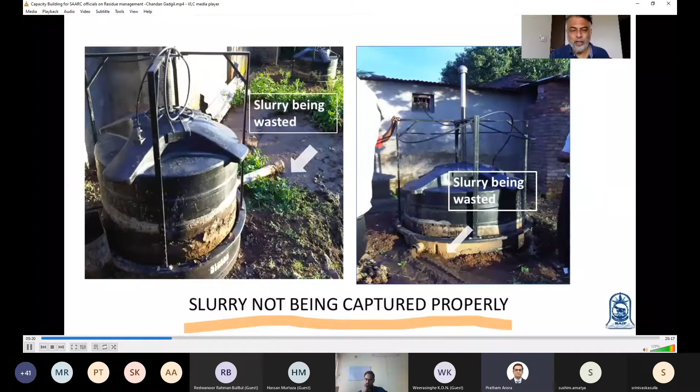This slurry normally, typically is either wasted or not used properly. So how do we capture the slurry or the residue? I will quickly talk on the small biogas plant and then move on to the large plants.

So this is what we have done in BAIF, where we have created a filter where the slurry is captured. The filter has two components: one is the top part and the second is the bottom part. The slurry comes in and it is kept for 24 hours, where it slowly trickles down and the liquid is captured at the bottom, and at the top we get the cake.

You can see in the third picture that this is the cake that comes out of the filter, and here we can collect the liquid. Both these are value added products where we can convert them into, say, vermicompost, and the liquid also can be put into the soil.

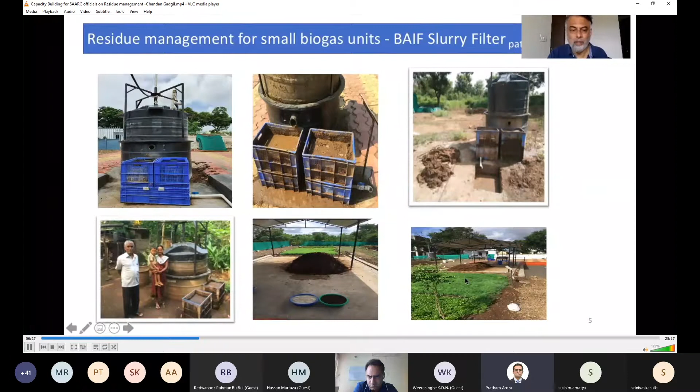We can improve the financial viability by focusing more on the value addition side of the residue. Now that is exactly what we have done at BAIF.

BAIF has developed a very good option for converting residue into a product called BioProm. It is biological phosphate-rich organic manure. It's one of the options to convert residue into value-added products. But the potential for this product is huge because it can reduce or replace chemical phosphatic fertilizers. So the market for this is really, really big.

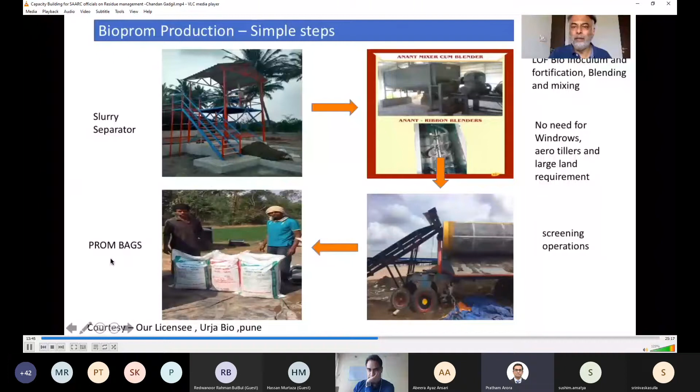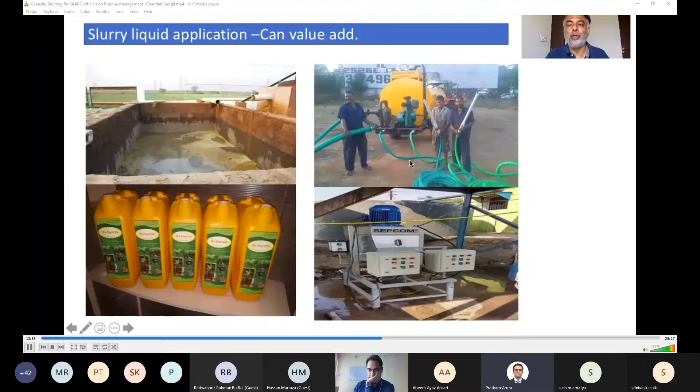Very, very simple process. The slurry that comes out also can be value added, as you can see here, and this also can fetch revenue for the biogas project.

Suppose we need a gas production of 1200 meter cubes. That will need a cow dung requirement of 30 tons per day. From the residue, if you make compost, you will get about 2 tons per day of compost. But if you make bioprom out of it, you can get about 4 tons of bioprom per day.

Now, because bioprom is value added, if you look at the profitability from compost, it is only 5,400 rupees per day, but profit from bioprom is coming to about 21,000. So there is a value add factor of almost 4 times, from 5,400 to 21,000.

The same case, if you take a press mud biogas plant, this is especially for sugar mills, if you are looking at large projects, where you need to generate about 12,000 meter cubes of biogas per day. Typically for 1 megawatt of power generation, you will need 12,000 meter cubes, and press mud of about 100 tons per day.

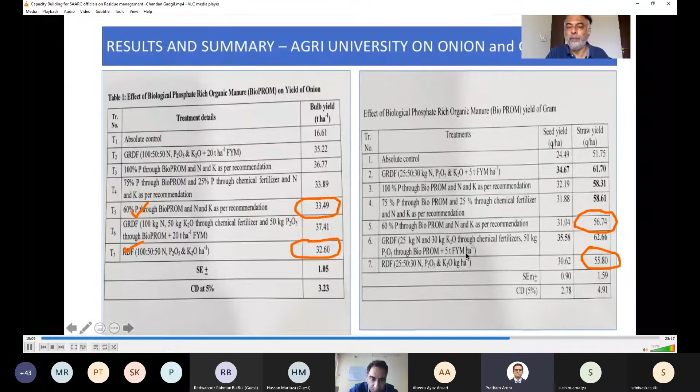We simultaneously did a study at the Agri University on onions and grams. There too, if you observe treatment number 5 and treatment number 7, you can see that the yield on bioprom as compared to RDF, the recommended dose of fertilizers, at the university level also gave the same result on onion and on gram. So the validation of this product has also been done very nicely.

About our organization, I think BAIF has been working since 1967 and has a lot of achievements to its kind of work. I would suggest if anybody is interested to look more into it, a lot of details are given on the website: www.baif.org.in.

In the last 7 years, we have focused on the IRISA and bioprom units. Till date, we have set up about 1,000 IRISA plants successfully. We have done 6 bioprom units at cluster level, 1 unit at institutional level, and 3 more bioprom units are coming up. We've developed a bioinoculum called LOF, which is showing a lot of effectiveness on bioprom production. We have also done field trials at the farmers level and at government universities with different crops and at different locations.

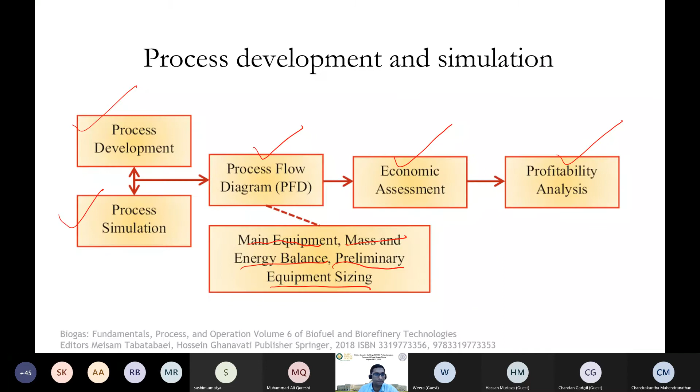This techno-economic analysis can be done at different levels. With respect to process simulation, there are different software available in the market. I'll give you a preview of one we use at IIT Roorkee, called Aspen Plus - one of the state-of-the-art software for providing mass and energy balance.

Here you can see a simulation prepared for upgrading biogas to a usable bio-CNG product. This gives us the different kinds of energy going to the compression or conversion, as well as the different outputs, makeups, and purge streams.

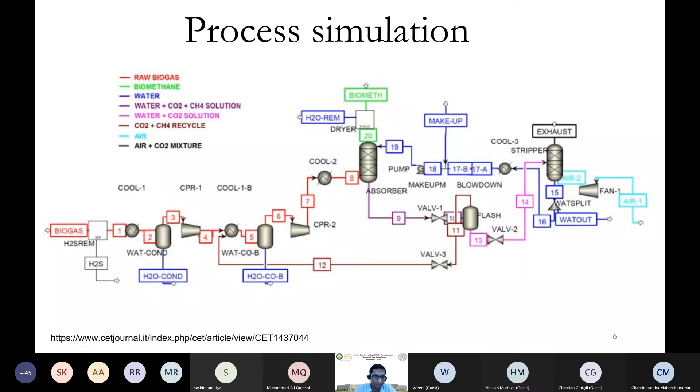So these kinds of software are very handy if you want to get a realistic output of what the mass balance is going to look like in reality. And these are all based on kinetics as well as thermodynamics.

Now coming to the different types of techno-economic analysis, these can be based on different classes. What we do at the university level is normally class 5 or class 4, which is on a very high level. The preparation effort is very less, and the accuracy is not very great, but this gives you a basic feasibility of whether you should go for the plant or the process or not.

Then at the other end, you have the project developers, who would be working at the class 1 study level, based upon first-hand experiences as well as deterministic ways of guiding the cost. These are much closer to reality. So there's a difference between the way studies are done by universities like us, or different think tanks or NGOs, as well as the industry, and there are different levels to it.

What we do is at level 4 or 5, because there are many assumptions that go into it. What the industry would be doing is the level 1 estimate. But it's always a good way to start with level 5 and go to level 1, and this is how they proceed. The advantage is that while doing a level 4 or 5 estimate, the cost is very less, whereas the cost increases almost 10 to 100 times when you go for a level 1 estimate.

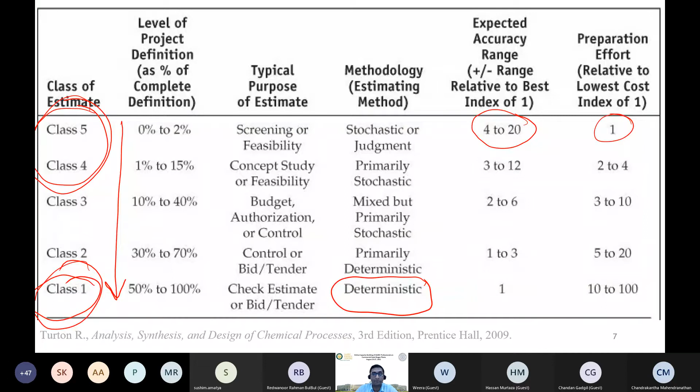What are the things involved? First, we need to understand that every technology has a learning curve. The cost estimates are first given by researchers, who may be sitting in different think tanks or universities. They see this is a good conversion technology, this is where you can fetch a lot of money, and they sell this technology to industry, or there's a collaboration.

The industry sets up a plant, it might be a pilot plant, and the costs are much higher as compared to what was initially told by the researchers. Of course, we are researchers, we are not economists, so we can't give you a 100% correct estimate.

But another thing that happens is, in the first of a kind plant, you would always go for better material, higher capacity, and more instruments. You need to be safe, you don't want to fail at the first attempt itself. But what happens with time, as time proceeds, the cost goes down, because it's a learning experience. You learn from your predecessors, you don't want to repeat their mistakes.

The supply line is set up, you know who the different suppliers are, and you tend to decrease the cost. This is what is expected to happen in large-scale biogas plants as well. We have reached this peak, we are somewhere here, and as time proceeds, the cost is going to go down because the learning in this field is increasing every day. The experience is coming both from the industry, as we have seen in the lectures, and there is learning coming from the researchers as well.

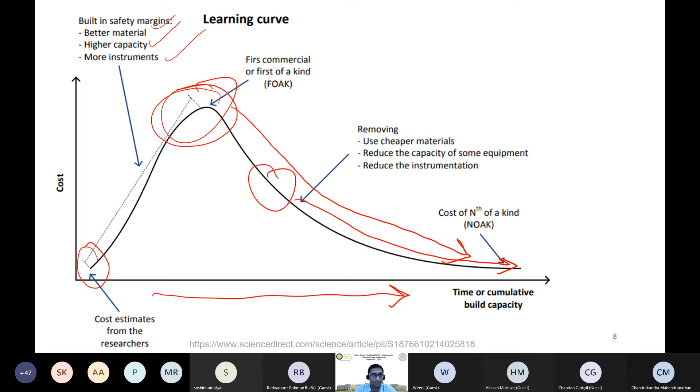Another thing we need to keep in mind while doing a techno-economic analysis is the plant location. We might come across different studies done for different countries, say Germany, which is one of the leaders, as well as for compressed biogas, Sweden, or somewhere in Australia or the US where they have set up a plant. If we want to replicate that, we need to take care that a plant there might not cost the same as in India. There are different location factors for every location.

These factors are available both in the open domain, and there are specialized agencies that supply these location factors. Normally, they are benchmarked against the US Gulf Coast, which is given a factor of 1. Then if you go for China, it would only cost 60%. If you go to India, it's very close, but this is for imported equipment, and if you also give the cost for India on the right-hand side, it's almost 70%.

And these factors are also a function of time. So if you are referring to a study somewhere outside, even among SAARC countries, the construction cost might be very similar, like in our immediate neighbors Nepal or Bangladesh, but it could be very different in countries like Maldives, because there would be a lot of supply chain difference. We need to take care that if something has a capex of 1 somewhere, it might not be the same elsewhere. There needs to be application of cost factors, and this could change the cost significantly. Something with a value of 1 in the US might cost almost 60% in China and 1.5 times in Russia, depending upon the different economies.

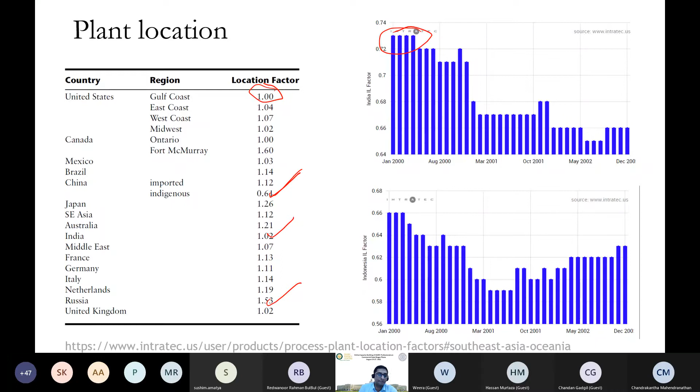Another thing we need to keep in mind is the cost index that is dictated by the market. If a plant was constructed 10 years back, it might not cost the same now. Of course there is inflation, but there's also a cost index we need to take care of, and there are many cost indexes that supply this value.

Here I give you the example of 4 common cost indexes that are available. The most common one is the chemical engineering plant cost index, which applies for biogas plants.

Then there are Marshall and Swift, as well as Nelson Farrar. They have their own base values corresponding to different years, and their base value starts at 100, giving you the trend. If some plant was set up, say 5 years back, and you were to set up the same plant today, what would be the cost difference? This is something we need to account for if we want to replicate a plant that was there in the past.

So first, I try to explain the concept of changing geographies. There is also a concept of change with time. With time, the cost indexes will change.

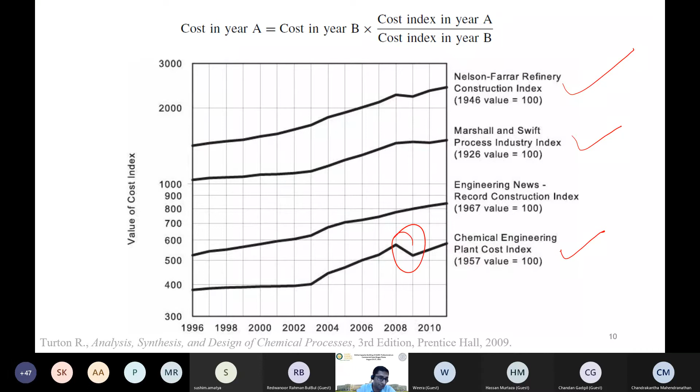It's not only that they're going to rise, they could even fall, because of different geographical regions and different reasons that might be applicable. Then something we are going to gain at a large scale biogas plant is the economies of scale.

To put it simply, it means that if I manufacture something at a bigger scale, the value is going to come down, because there is not a linear rise with respect to the labor that would be employed, or the different operations, or the energy that is consumed.

Take the simple example of a compressor. If you go for a bigger compressor working at full load, it's going to consume less energy per unit of gas compressed, and also the capex is going to go down. It doesn't have a linear relationship. So the cost of different equipment doesn't increase linearly as we increase the size of the plant.

This is where the advantages can be. We can see why China is the global manufacturing hub - because they're manufacturing everything at a bigger scale. Why is Tesla at the front of the EV market? Because again, they are going at a very large scale and benefiting from the economies of scale. This is something we can see in the case of biogas as well.

This is just one study which was based in the UK, from 4 years back, and they have provided this data. If someone is interested in understanding it, I've given all the references where these tables and values are coming from - you can look at those tables.

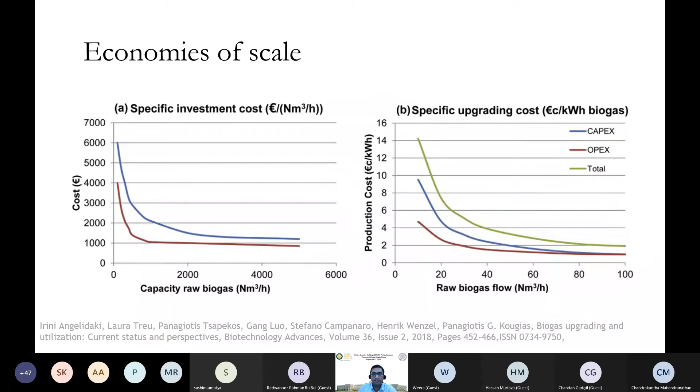Then for the techno-economic analysis, you would of course need the capex, and this I believe has been explained by Srinivas in the previous session. Basically, there are 2 things.

One is the total capital investment, which would consist of the fixed capital, majorly dominated by your equipment, and then there will be indirect cost with respect to engineering, supervision, contractor fees, and contingency.

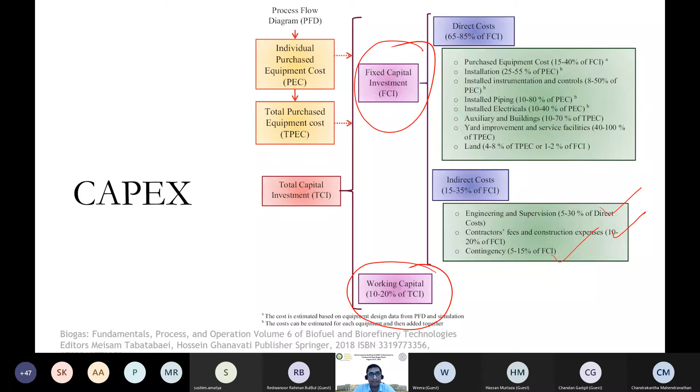And then there would be working capital, which is basically for running the plant. So these 2 things are the major factors that dictate your capex.

The other thing would be your operating cost. The operating cost would mainly consist of your day-to-day running cost, and this would consist of the direct production cost, mainly comprising of the raw material and the utilities.

There would be also manpower that is involved. Then the fixed costs like income taxes, rent, insurance, depreciation, and plant overhead in terms of supervision and maintenance.

This is not very big in India, but there are also general expenses like research and development or financing - we wouldn't go much into that. But this is how the things would be developed.

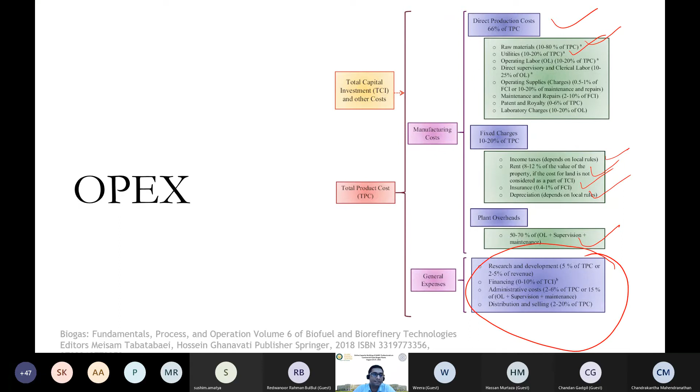They're not going to come in for the first few years where you're just returning the cash. It's only going to come after a payback period of 3, 4, 5 years. And this is for you to decide if this is a good cash flow for me to go ahead with the plant.

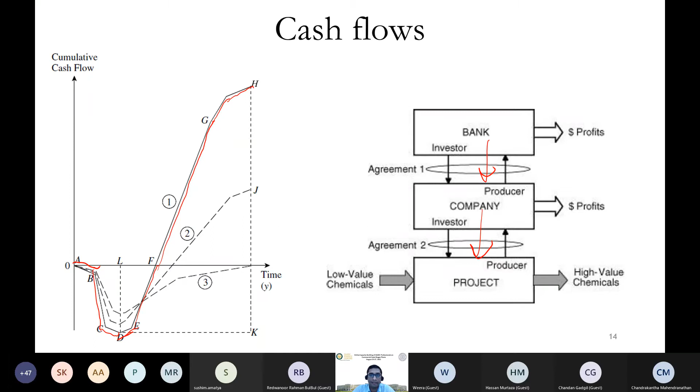An important point to also take care of is the debt and the equity. So if you're taking a debt, you need to return that, and there is going to be a loan interest that you need to pay. So either the project can be directly funded to the project, or you fund it like a company putting its money, and it is then indirectly taking the money from a bank. So you need to take care of these things, which is normally neglected when you're doing a level 5 analysis. But these things come into play when your economic analysis is increasing in the class.

And this is something that you should be able to get. You can see in the earlier part it's going to be negative, and slowly it picks up around 3 to 4 years after that. You should be able to come up with a net present value based upon the discount rate that you choose. This discount rate is based upon the company's profile that you choose, and it's basically used to calculate the net present value. I'm not going into the basics of the economics, I'm leaving that to you. I hope many of you understand that. But given the constraint of time, this is how you would end up with a techno-economic analysis.

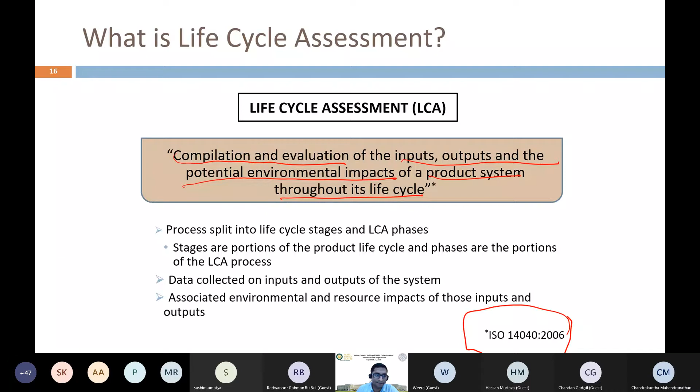Just to give you a brief of the LCA. This LCA came around 50 years back. It started with an initial energy analysis, when there was the oil crisis in the Gulf, and people thought we need to understand how to get the energy, so they started with energy analysis. Then came the resource analysis. Then in the 1990s, when global warming became prominent, it started with the greenhouse gas assessment, and after the 2000s, it came to be known as life cycle assessment.

But the main movement when the life cycle assessment gained prominence was an OECD report entitled 'Biofuels, Is the Cure Worse Than the Disease?' It was in the year 2007. Some of you might want to read this report. This is what brought prominence to the life cycle assessment, and it was biofuels, which is one of the topics we are discussing.

So biofuels as such are very good at decreasing CO2 emissions. But at the same time, we need to take care that the water footprint or the land use change is not that great, that it overshadows the CO2 emissions benefit.

We all know global warming is a big problem. It is something that is happening for sure, there's nothing denying that. We recently had the IPCC 6th assessment report a few months back, and you can go through it. There is, I believe, total consensus now that climate change is happening, and we need to do something about the CO2. Biofuels or biomass energy is a great source for doing that, but again, that has to be done in a sustainable way.

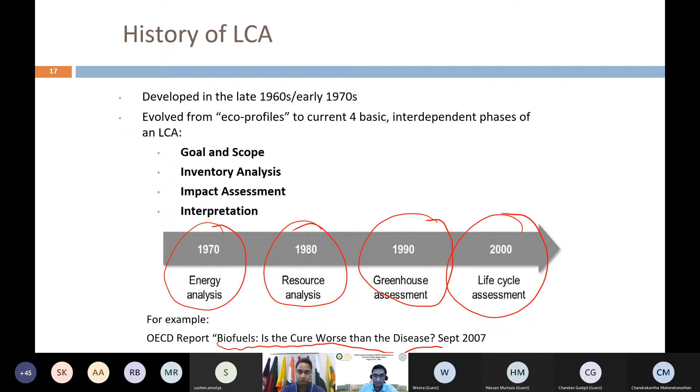Some of the major commonly used metrics in LCA are energy demand, global warming, ozone depletion, water footprint, and land use. Global warming is one of the things we normally hear about whenever environmental issues come in, but that's not the only thing we should be worried about. There are other things as well - we need to consider ozone, water, as well as land use. These are making a huge impact as far as biofuels are concerned.

Then there are different LCA studies that you would come across in literature, done by researchers like us or by different players or NGOs, and they would be adopting different system boundaries. It could be a gate-to-gate approach, cradle-to-gate at the retailer, or cradle-to-grave. And now they're also talking about why not cradle-to-cradle. So it basically depends on what all you are including. If you're just including the biogas plant, it's the gate-to-gate approach.

You're not concerned where the biomass is coming from. If you take into account the growth of energy crops, you should go for a cradle-to-gate approach. If you're also worrying about how the electricity or natural gas you're producing is getting used, you should go for a cradle-to-grave approach. In case you're also looking at biofertilizers, it could be a very nice example of the cradle-to-cradle approach, because the biofertilizers would produce more biomass, which can produce more biogas. So you're just completing the cycle and working towards a circular economy.

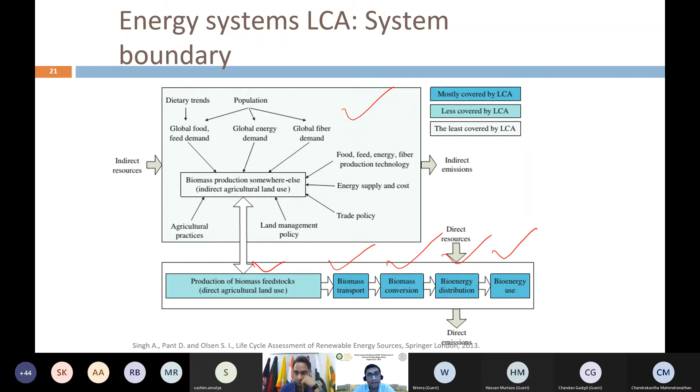Then another thing we need to understand is biogenic carbon. Many of us would want to say, since I'm using biogas, it's going to be carbon neutral. Well, I would like to say that most biomass supply chains or biomass energy systems are not carbon neutral, and I will try to explain that. The reason is that if there was a tree or plant or source of biomass, if that was left to naturally decay, it would send all the CO2 to the atmosphere. And when you're growing that biomass again, it takes back that CO2 and the cycle is complete.

But what happens in a conversion system, including that of biogas, is you have that biomass, but you will also be taking some energy from the grid, in the form of electricity or a heating system. And what you emit is both the biogenic carbon as well as geologic carbon, which is coming from the fossil fuel. What is taken back when the biomass grows again is just the biological carbon. So in essence, you're emitting something extra to the environment. So I would restrain from saying my process is carbon neutral, because very rarely are processes carbon neutral.

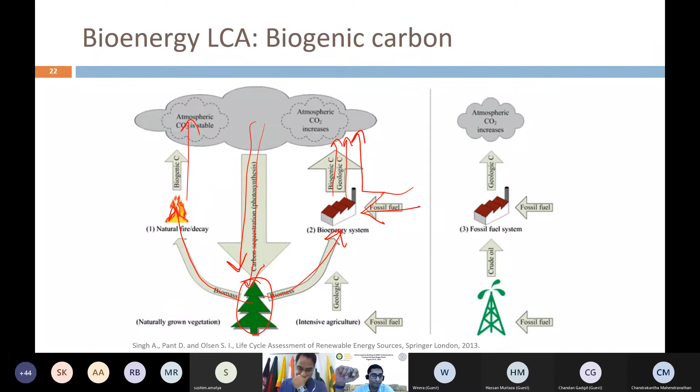But nonetheless, this doesn't overshadow the advantage of processes like biogas, because they have enough savings that can be done to the environment. This is the same example that I've given with respect to land use. Maybe I can skip this in the interest of time.

But just to give an example, when you're growing biomass, there's a huge amount of water, fertilizer, and pesticide going in. And this becomes important if you are producing biogas from energy crops, because all of this would be accounted into your final product.

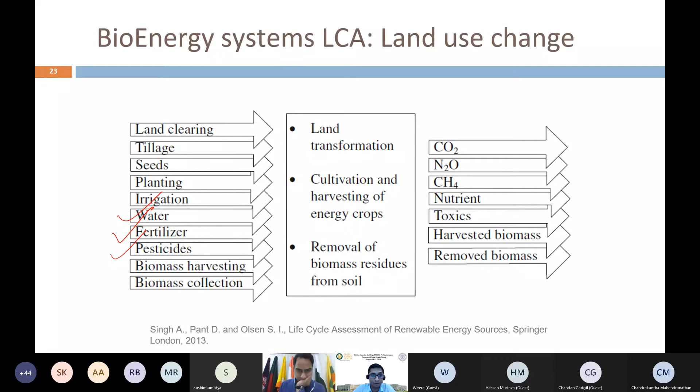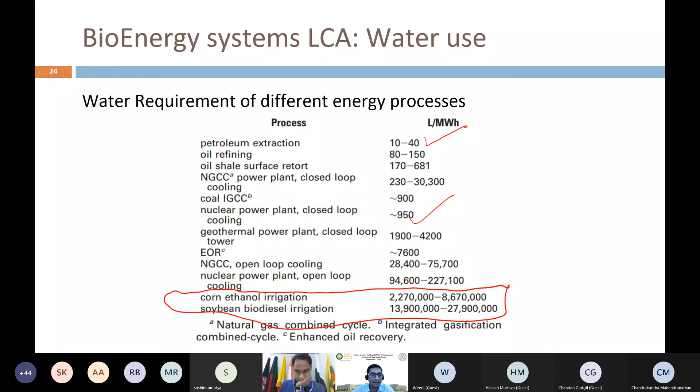Just to give an example, we sometimes overshadow the water requirement of bioenergy processes. Here I've given some typical use of water per megawatt hour of energy produced from different sources. It's very less for petroleum products, somewhat higher for nuclear plants, but very high for plants that use bioenergy. Of course, we don't have biogas here, but since we need to dilute the manure, like if you're using cattle dung in a 50-50 ratio with water, we can recycle a great deal, but still we are using a great amount of water. So we need to understand that the water footprint is something we need to be worried about as well.

And when we are having different products, this is something typical of LCA: how would you attribute the emissions? Let me give you a simple example. Say I have a unit process that is producing 20 kg of product A and 80 kg of product B, and the emissions are 1 kg. If I was to allocate that just on the basis of weight, it could be very simple: I allocate 20% of the emissions to product A and 80% to product B.

But what would happen if the economic value of the products is very different? This 20 kg of product can fetch me $900, and the 80 kg of product is just fetching me $100. If I do an allocation on the basis of economics, the emissions will just get reversed. This is something that happens when we are talking about bioenergy systems as well. The byproduct we use for biogas production might have a high value in terms of weight, but a very low value in terms of economics. So different LCAs could have different assumptions, and this would make the results topsy-turvy. So you need to be careful and consistent about the values you're adopting in your LCA.

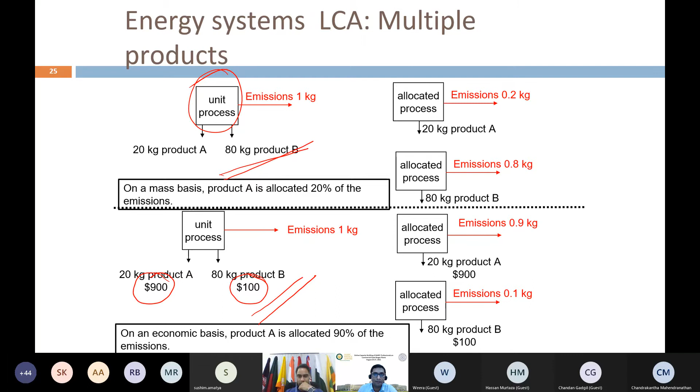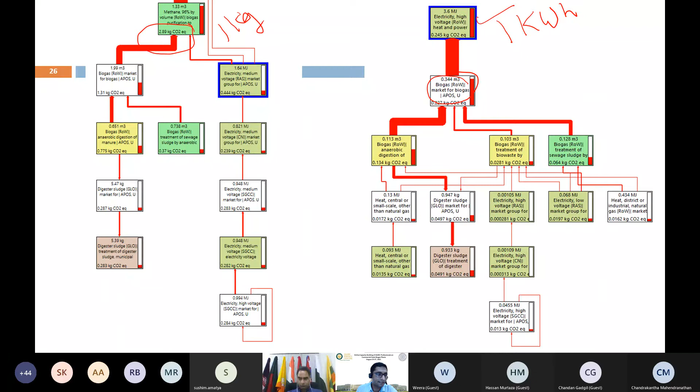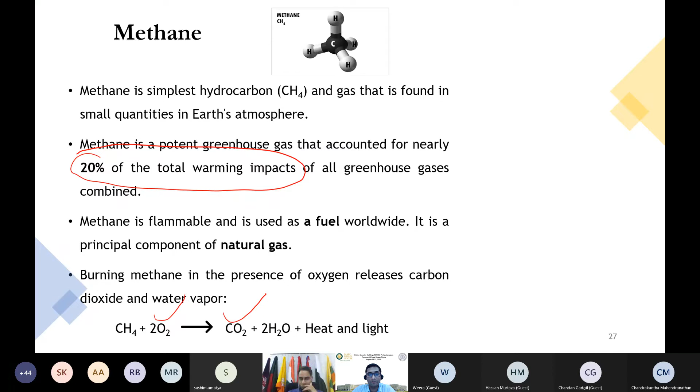So if I emit 1 kg of methane into the atmosphere, it's equivalent to emitting 25 kgs of CO2, and this difference has a huge consequence. Whereas if I burn methane, it takes just 2 molecules of oxygen and produces 1 molecule of CO2. So 1 molecule of CH4 becomes equivalent to 1 molecule of CO2. The molecular weight isn't very different, so it's almost the same amount contributing. It's always a benefit to burn methane, to emit CO2, rather than emit methane.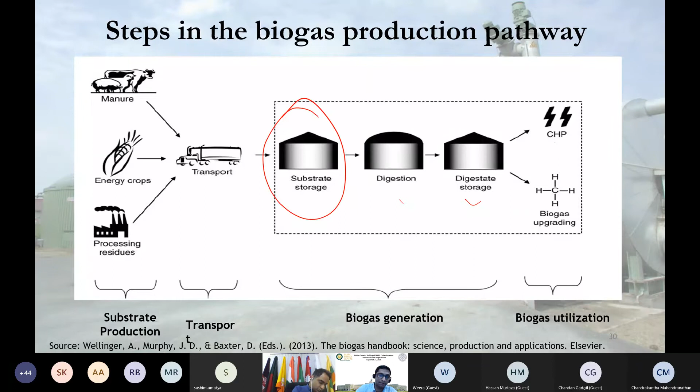If this methane leaks out of the process, it could have a damaging effect on the overall sustainability of the plant. This is gaining prominence nowadays - if we're going to look at the sustainability of a biogas plant, we need to be very concerned about methane leakages, which normally happen in the storage phase, digestate storage, or the biogas upgrading phase.

I have all the slides shared, and I won't go into them right now in the interest of time, but there could be huge leakages. Some emissions, like leakages, could be as high as around 45% of the total methane that I am manufacturing or contributing.

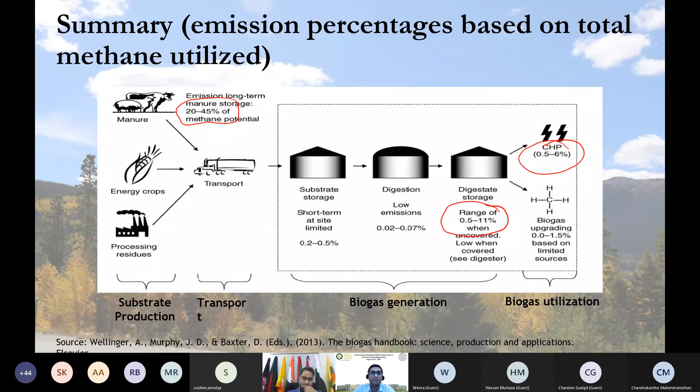And then there could be huge leakages in the digestate storage as well as in the CHP. This is something we need to be concerned about when talking about production of methane from a biogas plant, because it would affect sustainability in the long run, and we need to be careful about it.

Let me briefly introduce a recent study done last year in China - they set up a huge plant in the Jing'an district. The capacity was almost 6.57 million cubic meters per year, which brings out around 18,000 meter cube a day. That's a fairly big plant.

They did an LCA for that, and what came out was their methane emission reduction, because if the dung or manure was left in the open atmosphere, it would be releasing methane anyway. If you're converting that into compressed biogas as well as electricity, you can save a good amount of CO2.

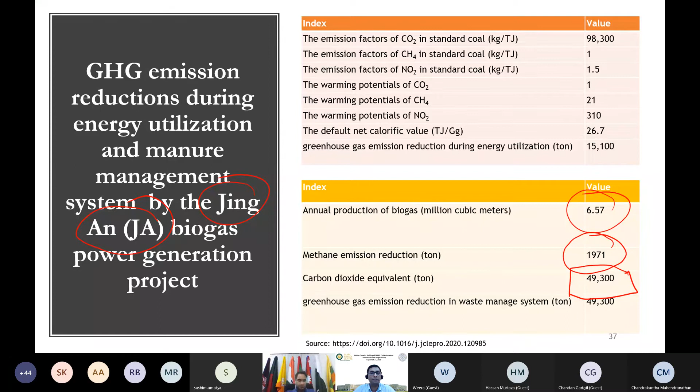So the yearly saving was 50,000 tons of CO2 equivalent, and that is huge. This can gain you good value if you use some carbon trading mechanism as well. So this life cycle assessment becomes very essential if you want to trade in these emissions, and these emissions could be huge, as seen in this case study done last year in China. So this was with respect to the life cycle assessment.

Now let's go towards the social aspects as well. Social aspects mean our life should be easy, comfortable, economically sound, and I should have a respectable living. I will take you through some recent studies on this.

This was a study done 5 years back in Bangladesh, for the Satkhira district, looking at the effect of installing a biogas plant on the life of the rural population. A direct effect was that people started using the biogas, leading to a reduction in firewood, dung, agricultural residues, and LPG they were buying. So they had an economical saving, nicely utilizing the cattle manure which they had in plenty for producing the gas. This helped in increasing their economic status.

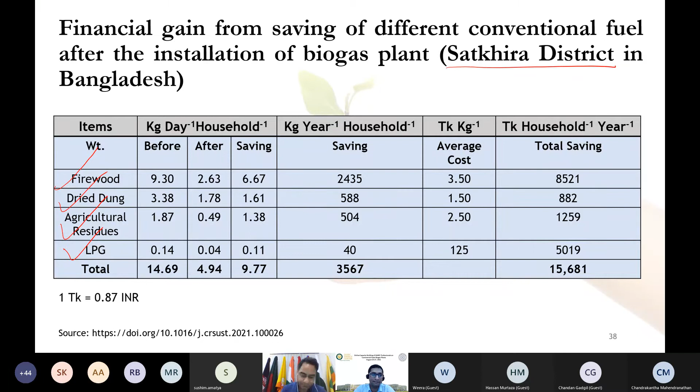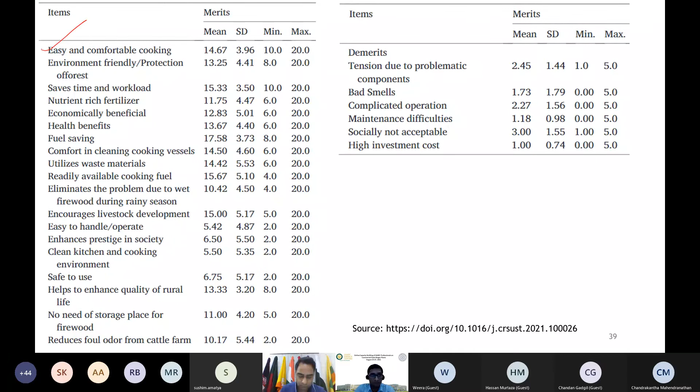Then there was another survey done at the same place, for about 250 families, and this is what their opinions were. Most of them felt biogas gave them easy and comfortable cooking, saved time and workload, gave them nutrient-rich fertilizers, was economically beneficial, and had health benefits. On a scale of 20, a maximum number of people were happy with that, though some were not of the opinion that it's safe to use. So we need to be aware of that.

Some of the demerits put forward during this social experiment were problematic components - if the plant is not operating, it becomes very difficult to start it again. Smell is an issue, people find it complex in operation, there were maintenance difficulties, and some felt there was a high investment cost. But overall, the social benefits that people were getting in this district far outdo the demerits.

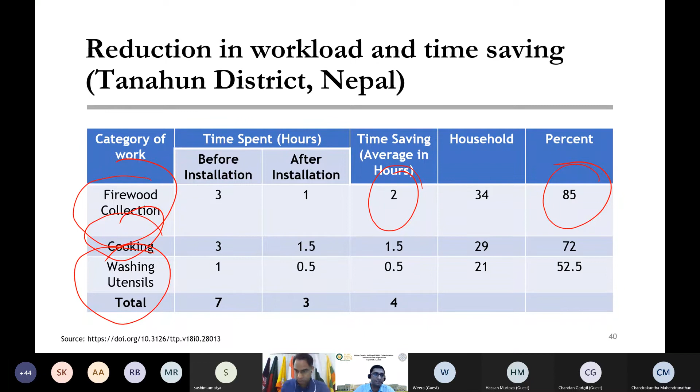A similar study was done in Nepal, just 3 years back. They set up biogas plants, and an analysis was done on whether it saves any time - in firewood collection, cooking, and washing of utensils. 85% of the people believed there were at least 2 hours of saving throughout the day, which can be used for recreational activities or improving livelihood. So a biogas plant provides clean fuel and saves you from traditional practices like firewood collection, still common in rural areas.

Again, in the same studies, 80% of the people believed that the slurry improved agricultural production. So not only biogas, but the manure or fertilizer, even used directly without upgrading, has a big effect in the field - not to mention products like biochar or others. People had a dual benefit: getting clean fuel and also good manure, which helped increase their farm productivity.

Let me also take you through another study done recently in Africa, in Ghana, looking at whether biogas plants coming up in the region helped in job creation. The answer was yes - it helped create a lot of skilled as well as unskilled jobs, and people were really happy with the setting up of the plants. If these biogas plants are set up in rural areas, where there is plenty of feedstock, this could be a source of job generation as well.

I would also like to share with you a small video that I myself recorded last year. We were on a plant visit, and we would like to take you there tomorrow as well. This is something I shot myself, and it's in Hindi, so I'll translate that for you.

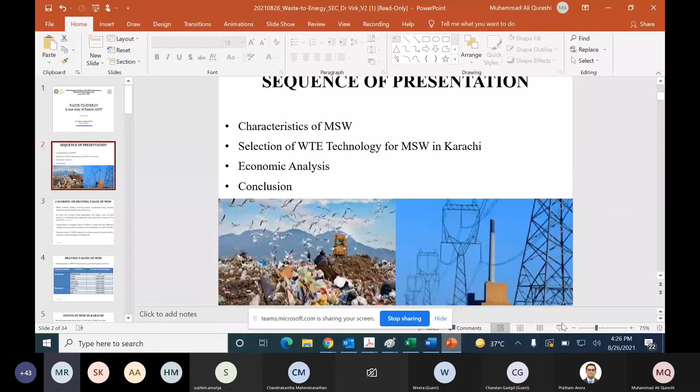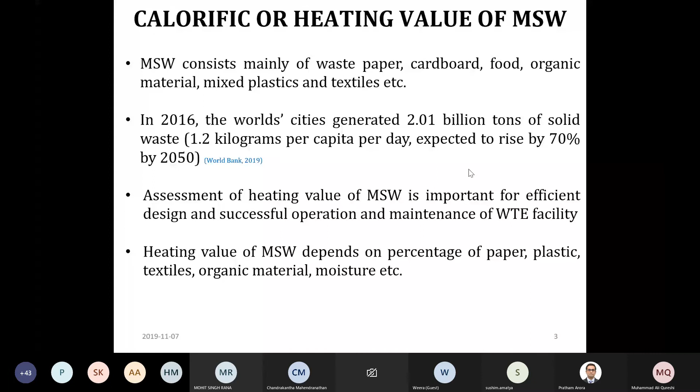So the status of municipal solid waste in Karachi - Karachi, one of the biggest cities in Pakistan, with a population of around 15 million, generates more than 13,500 tons of municipal solid waste per day.

At the moment, Karachi has three landfill sites, and handling 1 ton of municipal solid waste incurs a cost of nearly USD 33 dollars per ton, according to the Sindh Solid Waste Management Board.

According to the Sindh Solid Waste Management Board, the indigenous waste lying open at the landfill sites of Karachi comprises 54% organic matter.

So waste to energy, as you already know, is one of the rapidly and fast growing technologies in the world, mainly because it reduces the demand for landfills. It reduces demand on fossil fuels, reduces environmental impacts, and also helps us contribute towards the sustainable development goals.

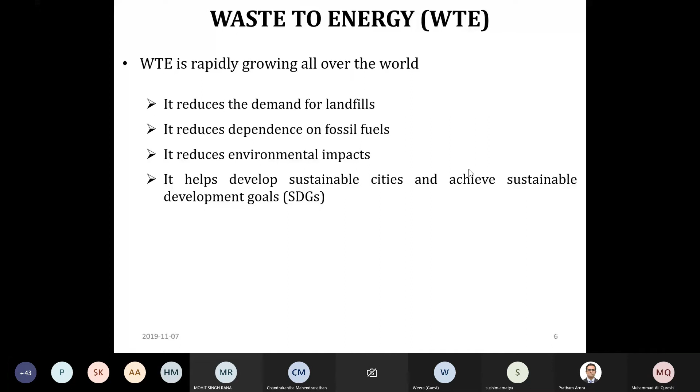So these are some of the waste to energy technologies. When talking about municipal solid waste, we have biological conversion, landfilling, and thermal conversion. Thermal conversion includes incineration, gasification, and pyrolysis. For biological conversion, we have aerobic composting and anaerobic digestion, which produces biogas, leading to generation of electricity or energy.

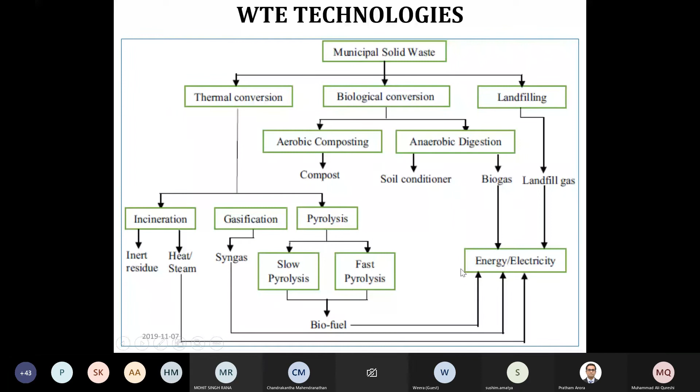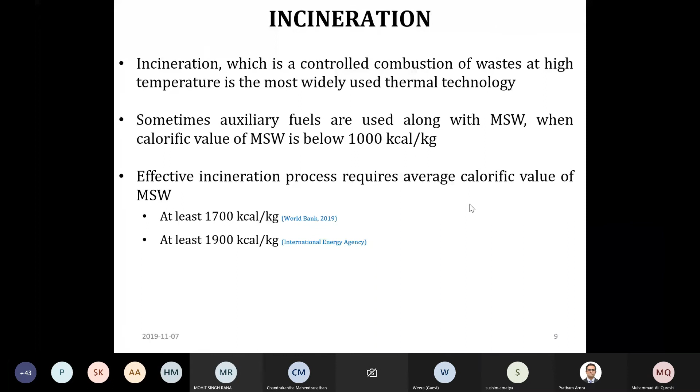I don't want to go into detail on these various technologies, as I'm assuming you already have prior knowledge of that. For anaerobic digestion, as my colleagues have already explained in their earlier presentations, it's a process of microbial degradation of organic biodegradable matter in the absence of oxygen. Biogas is typically composed of 50 to 75% methane, 25 to 50% carbon dioxide, and 1 to 15% other gases and vapors. The produced sludge could also be used as fertilizer.

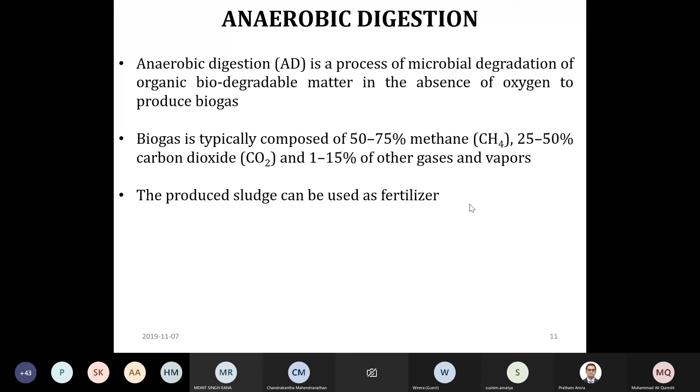I would like to show this slide with the costs of different waste to energy technologies, obtained from different sources. For incineration, it's around 400 to 700 USD per ton of municipal solid waste per year, and the operational cost is around 40 to 70. Similarly, for anaerobic digestion, it's around 50 to 350, depending on the plant site and other parameters, and the operational cost varies from around 5 to 35 dollars per ton of municipal solid waste per year.

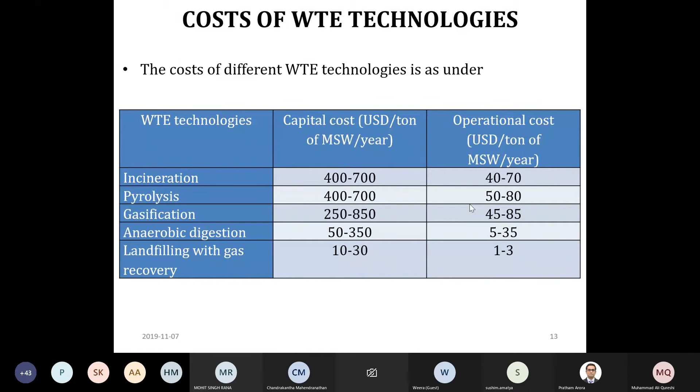Moving ahead, the selected waste to energy technology for Karachi is anaerobic digestion, mainly because it offers decentralization of energy and power generation. Rural and remote communities that are not connected to electricity grids are able to produce their own electricity. For information, in Pakistan 23% of the population lacks access to electricity. Once started and stabilized, the plant produces biogas on a continuous basis, independent of external factors such as sun or wind.

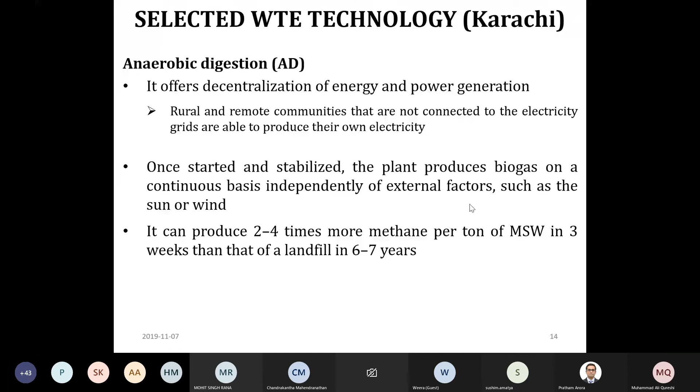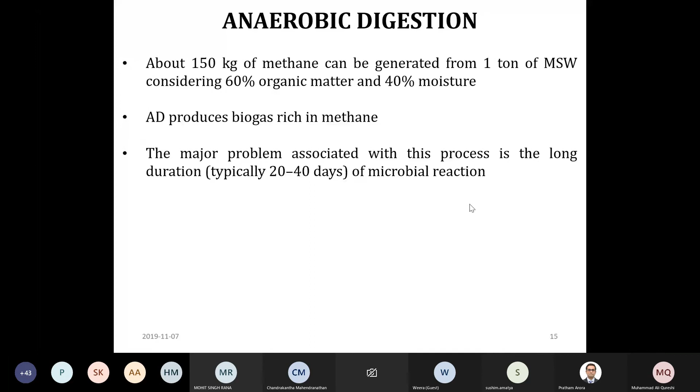It can produce 2 to 4 times more methane per ton of municipal solid waste in 3 weeks than a landfill does in 6 to 7 years. With anaerobic digestion, about 150 kg of methane can be generated from 1 ton of municipal solid waste, considering 60% organic matter and 40% moisture content. AD produces biogas rich in methane, and the major problem associated with this process is the long duration, typically 20 to 40 days of microbial reaction.

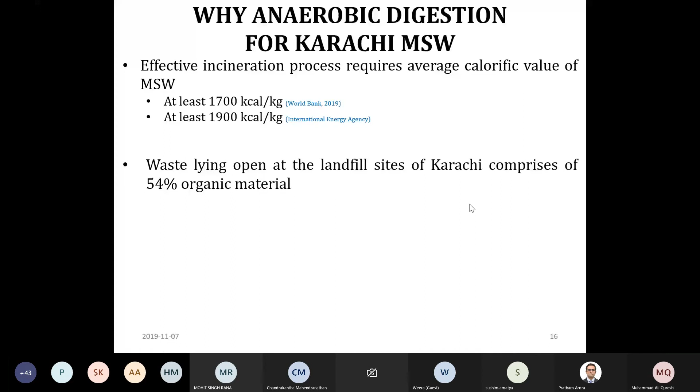So why anaerobic digestion for Karachi? An effective incineration process requires an average calorific value of municipal solid waste of at least 1700 kcal/kg, and at least 1900 kcal/kg, according to the World Bank and International Energy Agency. Waste lying open at landfill sites in Karachi comprises 54% organic content, as already mentioned. This technology has been proposed due to the lower fraction of combustibles and lower heating value caused by separation and scavenging, high moisture content, and high organic fraction.

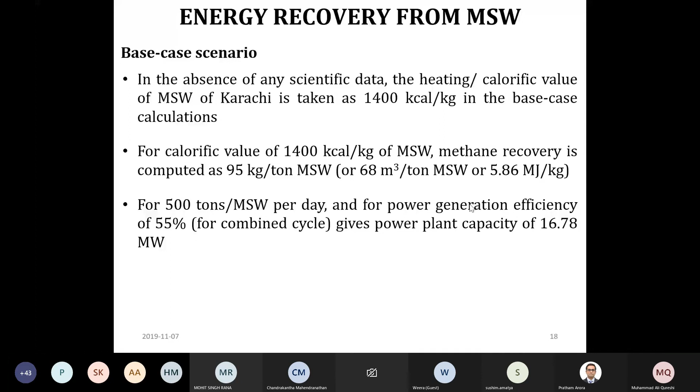This is the base case scenario. In the absence of any scientific data, the heating calorific value of municipal solid waste is taken to be around 1400, and for a calorific value of 1400, methane recovery is computed to be 95 kgs per ton of municipal solid waste. For 500 tons of municipal solid waste per day, and a generation efficiency of 55% for a combined cycle plant, this gives a capacity of 16.78 megawatts.

This is the financial and economic analysis according to the base case scenario. The parameters for calculation are the calorific value, around 1400 as already discussed. The unit capital cost in USD per ton of municipal solid waste per year is around 300. Unit operating cost is around 20. The interest rate, as per the State Bank of Pakistan, we've taken to be around 13%. And the tipping fee for this is around USD 10 per ton of municipal solid waste.

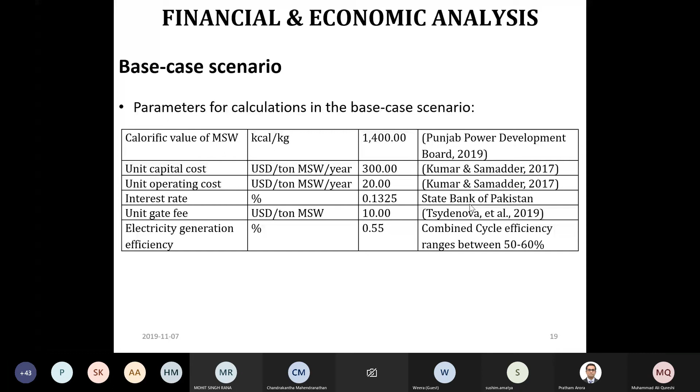The generation efficiency for the combined cycle is considered to be 55%. With a capital cost of USD 300 per ton per municipal solid waste per year taken for the base case scenario, and considering a plant size of 500 tons per day of municipal solid waste with a plant capacity of 16.78 megawatts, the capital cost comes up to be around USD 54 million, and the annual operating cost is computed as USD 3.65 million per annum.

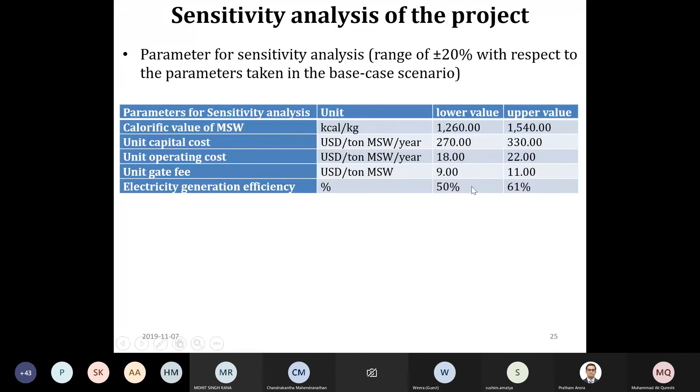With this sensitivity analysis, for the lower calorific value of 1260, the NPV comes up negative, the cost benefit ratio is less than one, and the IRR is also 12%. But for the high calorific value, the project is feasible again, with NPV positive around USD 23 million and IRR around 19%.

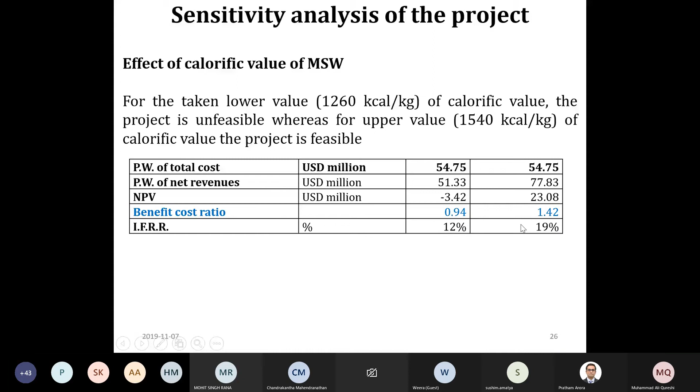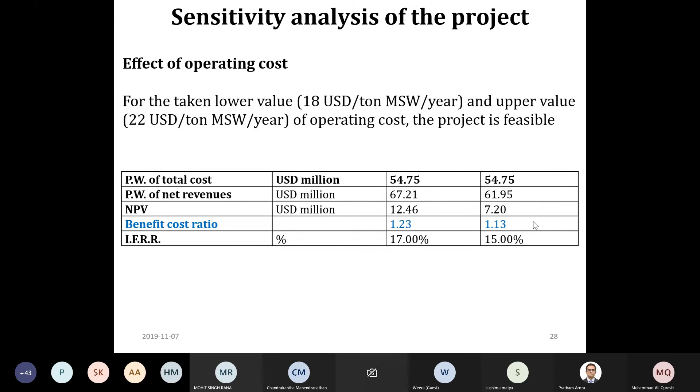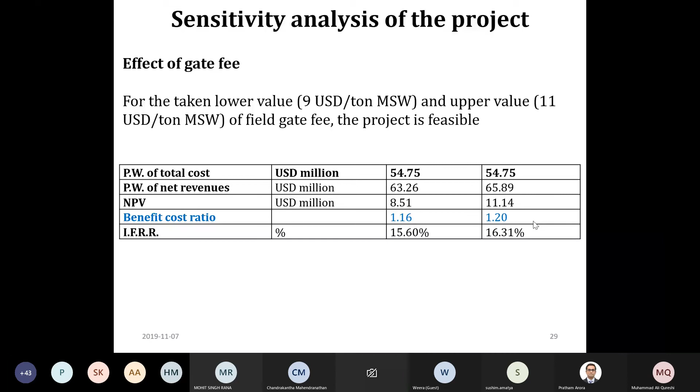For the operating cost at 18 USD per ton, it is feasible in both the lower and upper case scenarios, around 17% and 15% respectively. For the effect of tipping fees, at 9 USD for the lower value and 11 USD per ton for the upper value, the cost benefit ratio is more than one in both scenarios, and the NPV tells us the project is feasible.